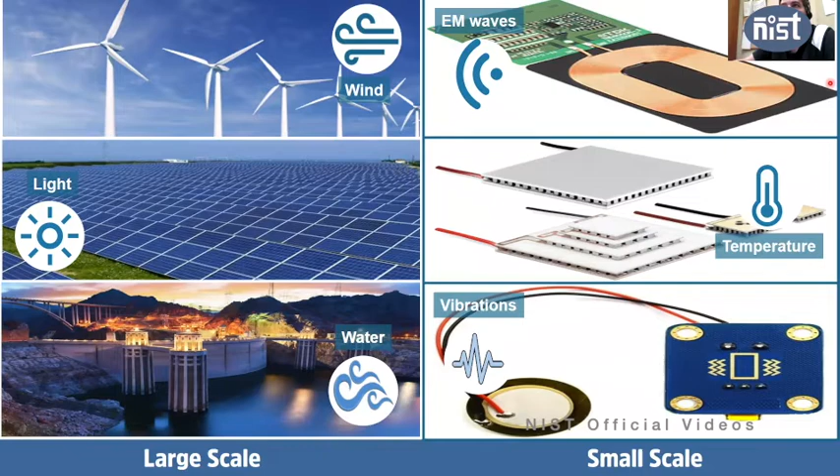So these different energies available in our environment can be harvested using different devices. Typically RF coils for electromagnetic waves, Peltiers using the Peltier effect from temperature gradients, or for vibrations and more generally mechanical motions, piezoelectric materials can be used. This gives rise to small-scale electrical energy generation using any of these three devices.

So the question is, why do we need such a diversity of power scales, and what are these low power levels useful for? The answer is two reasons. The first is that these energy harvesters are becoming more capable—nowadays we are getting more energy out of these small devices.

The other reason is that the electronics we currently use are using less and less power. So as they become lower power consumption, we can get these small-scale energy harvesters to feed our electronic gadgets.

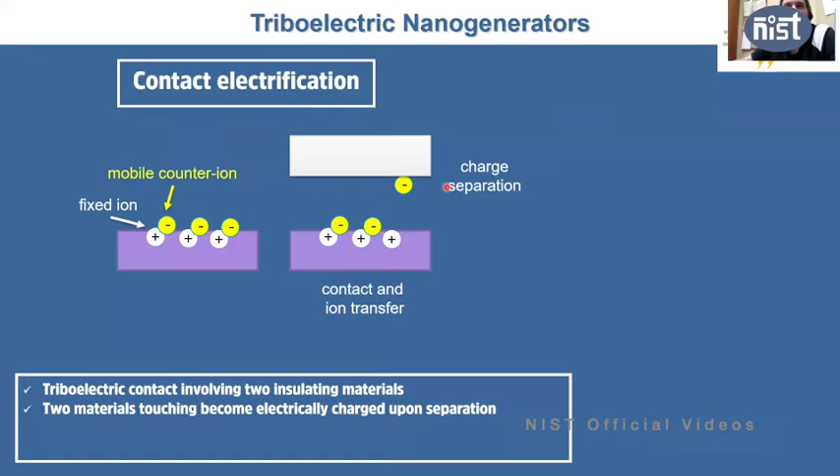So you get one negatively charged material and one positively charged material, and you can choose the materials from what is called the triboelectric series. This has been known for over 100 or 200 years, and this series orders materials according to their ability to become negatively charged, meaning they capture electrons, or positively charged, meaning that they release electrons when in contact with another material.

Typical materials you can find and use are nylon, a material that is very much used when you make these devices, and PMMA, so these are polymers typically on this side. On the other side, you get Teflon, which is very negatively charged, polystyrene, or PET. In the middle, you typically have metals, which do not transfer charges, so they don't become electrically charged in a large amount. What you want is to contact very highly positive materials with very highly negative materials, and you get the most charge transferred between the two.

When you have this charge transfer, you rely on electrostatic induction to generate an electrical current. You put two metallic electrodes on the backside of your insulators or polymers. Because the polymer is charged, these metallic electrodes redistribute their charges on the surface. The negative triboelectric material will induce positive charges on the surface of the metal, and the positively charged dielectric will induce negative charges at the surface with the dielectric.

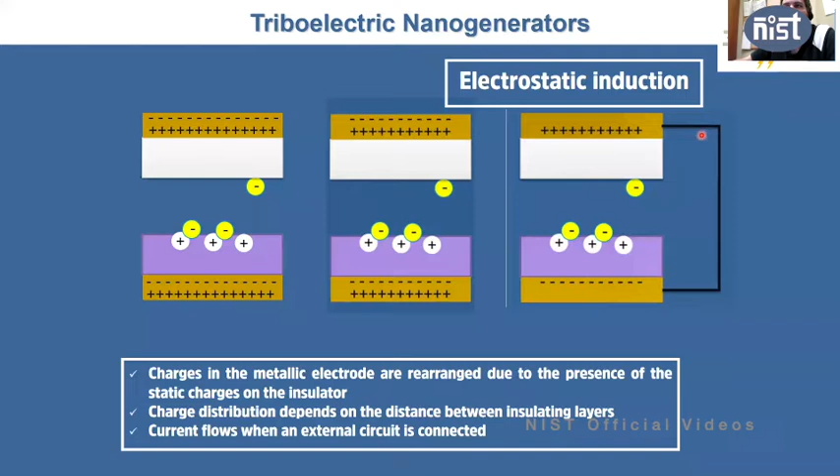Now you can move one relative to the other. As you move, you neutralize the charges and also the redistribution of charges on the metallic electrode. If you connect a resistance between these two materials, as they come closer, the current will flow from one electrode to the other. As they move backwards, the current will flow again and the charge redistribution will appear. So with this electrostatic induction, you have the possibility to drive charges through an external circuit.

If you join the two things, contact electrification that gives you the charged materials, with electrostatic induction that lets the charge flow through the external circuit, you have a triboelectric nanogenerator. This has been developing very fast since 2013, and there's a whole range of applications. The most typical is energy harvesting, but you can use it as active sensors or self-powered systems. They have already been demonstrated for implantable devices, electronic skins, and flexible electronics. So the range of applications for these triboelectric nanogenerators is extremely large.

They work in four basic modes. The most common is the vertical contact separation mode, where your two materials come in contact in the vertical direction via a mechanical motion, come out of contact, and this is repeated cyclically so that current flows through the external circuit. You also have the contact sliding mode, where the two materials slide on one another, and basically the same phenomenon appears. As one material goes away from the other, charge flows through the metallic electrodes.

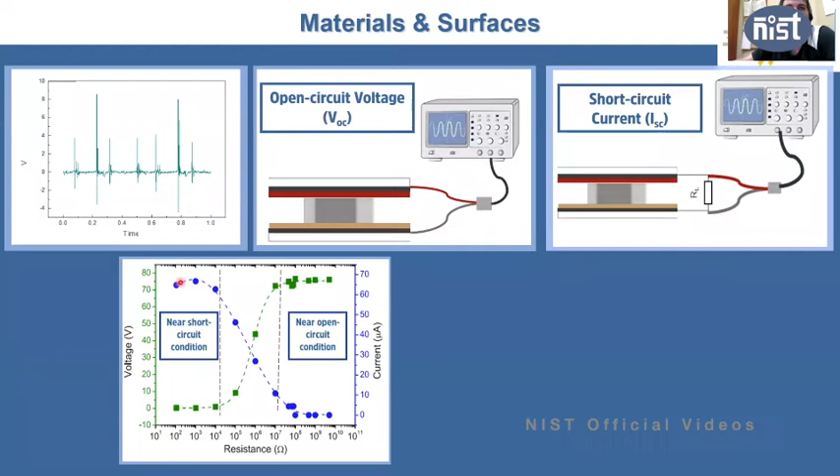And you vary then this load resistance that you put between the two metallic electrodes. And you get the near short condition, where you have a very high current and a very low voltage. You have the open circuit condition, where you have a very high voltage and a very low current. And you have a transition between the two, where the current goes from high to zero and the voltage goes from zero to high. Multiplying these two quantities, you get the power, okay? And you get the power as a function of the load resistance.

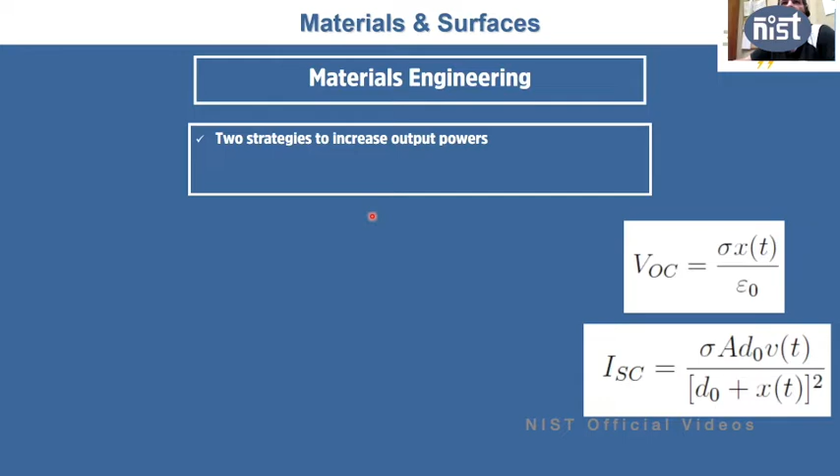And you have two strategies to increase these power outputs. The first is you change the surface triboelectrification. So you change the number of surface charges that you can get on a given material. And this can be done by changing the dielectric permittivity, because the surface charge is directly related to the dielectric permittivity, just like in a capacitor.

What we have done is PDMS doping with nanoparticles of silicon oxide. So we have changed the diameters from 22 nanometers to 367 nanometers, and we have changed the concentration of nanoparticles of silica that you put inside your PDMS material. And this is typically what you have. So there is a maximum of the electrical output, being the current, voltage, or even the power density. You have a maximum as a function of the concentration, typically around 5 to 8%, and this is related to the ability that you have for the material to distribute these nanoparticles inside the polymer.

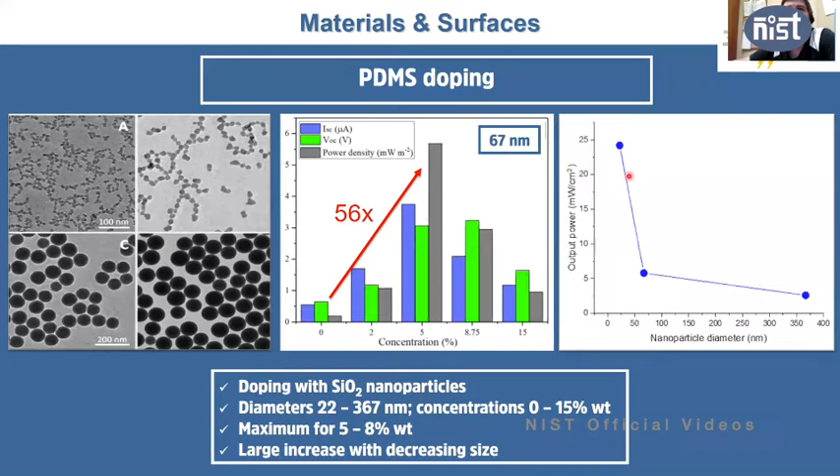It also depends on the nanoparticle diameter. You can get higher output voltages by doping the PDMS material with smaller nanoparticles. And we believe that this is related with the differences in the dielectric constant of these nanoparticles as the size goes down.

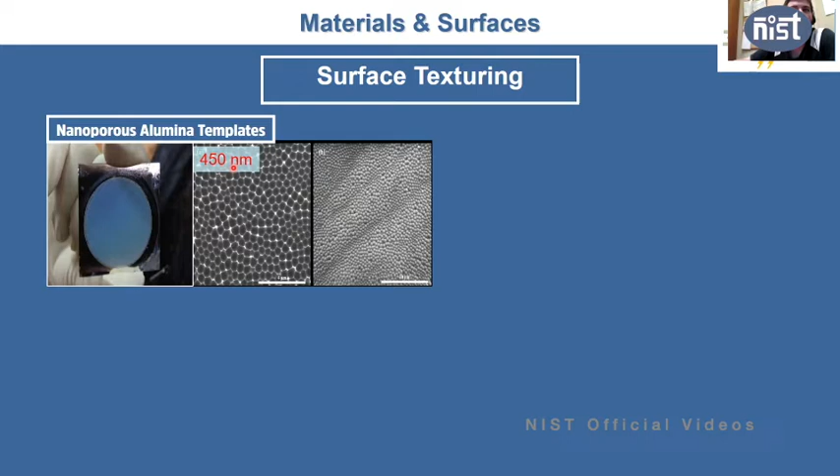You can also do surface texturing, so you can change the surface of your material by different mechanisms. One very simple method is to use nanoporous alumina templates. These are templates that you can get just by anodizing aluminum into an aluminum oxide. And if you do it right, you can come out with these small dimples on the surface of aluminum, and they can have nano-size features. You can go from 30 nanometers to 500 nanometers very easily.

And you can also use micromachined silicon molds, okay? And you can go from something that is on the nanometer scale to something that is on the micrometer scale, and see what happens on this multi-scale arrangement.

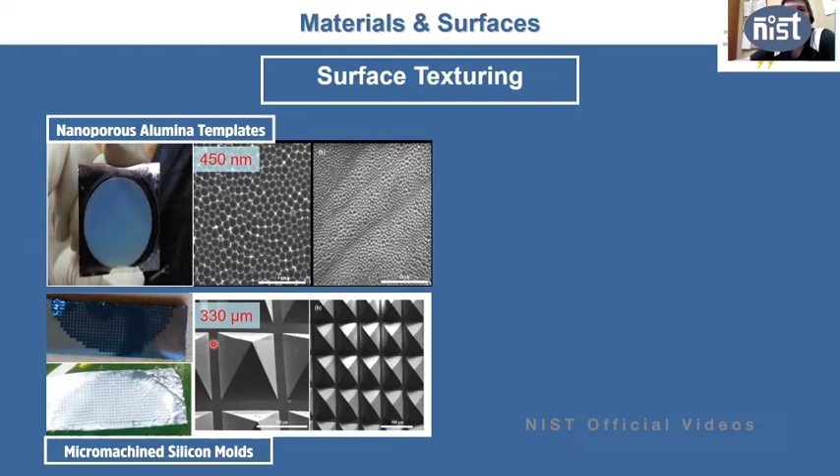This is just an example. So the output voltage that you get as a function of time for different structures. So for PDMS, simple PDMS films that are flat, with the silicon template that has micrometer features, and the aluminum template that has nanometer features. And what you get is typically a 2 times increase in the output voltage just by changing the surface of your material, of your triboelectric material.

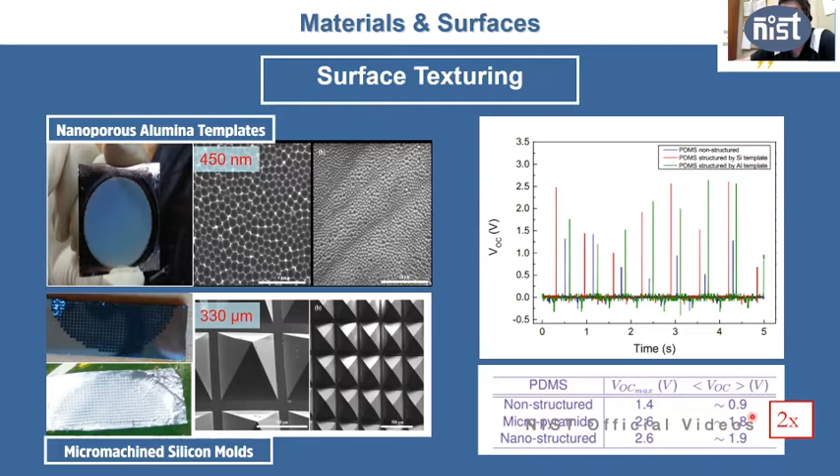And interestingly, the output voltage that you gain does not relate a lot with the size of your feature. So there is a minimum size that you need to get the maximum output increase available. Now that we have the materials, we have the testing system, we can integrate all of this on different applications. I'll start with footwear. This was one of the first things that we have done. So I'll go fast on these first applications so that I can focus on the ones that I think are more interesting at the end.

So we all know that while we are walking, we are putting pressure on our foot, and particularly on the heel. So if you look at the footwear, typically you have something like 7 by 3.5 centimeters square available on the back side, and we want to take advantage of this area to make a generator that can harvest your energy in walking. So with this area, we can put a triboelectric nanogenerator there. This is what we have done.

We have optimized the configuration that you can put inside, not only the size, but what can we do with these materials. So this is a very simple structure that looks like this. Here is one of the triboelectric materials, in this case Teflon. On the other side is nylon. You have the 2 electrodes on the top and at the bottom. The other structures are similar, but instead of these 2 parallel plate structures, you can have an arced structure, or a zigzag structure like this, where you can put multiple steps.

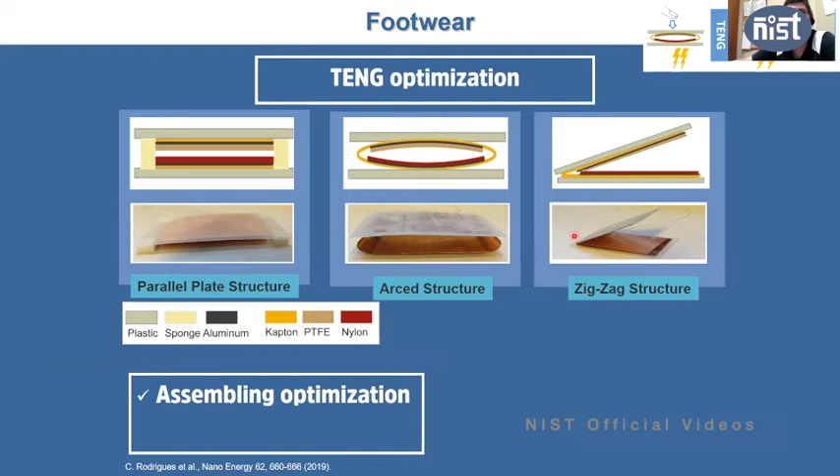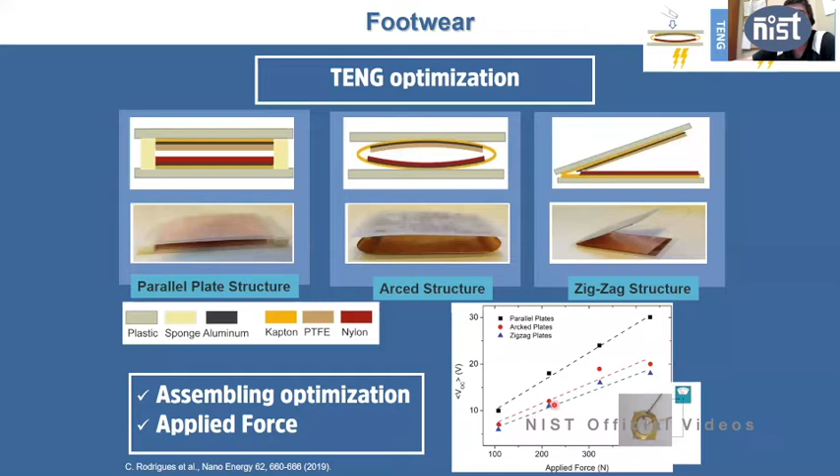So we have optimized this assembling, and what we found is that the parallel plates are typically the best for this particular application. We have changed the force. They are linear with the force. This can be important if you want a sensor. The 3 of them are linear, but after this we have focused on the parallel plates because it's the one that gives you the higher output power. And you can also change the number of pairs that you put there. So we went from 1 to 6. I'll show you here some of the results.

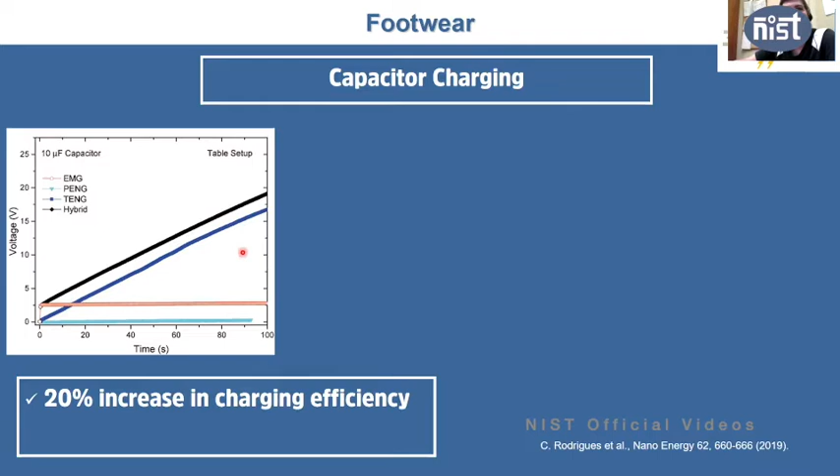But if you use the hybrid generator that we have done, you have a fast increase coming from the electromagnetic generator at the beginning, and then the steady increase from the triboelectric generator at a later stage. And this gives you a 20% increase in the charging efficiency. So we have integrated this in footwear; this was the table setup that we have. This is already on the shoe, and you get more or less the same behavior, and you can charge different capacitors integrated on a shoe, and this can then be used to charge some sensor or other electronic gadget.

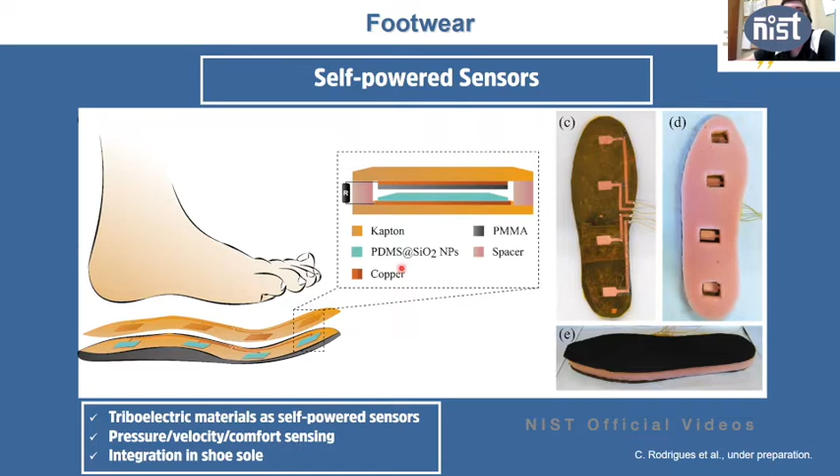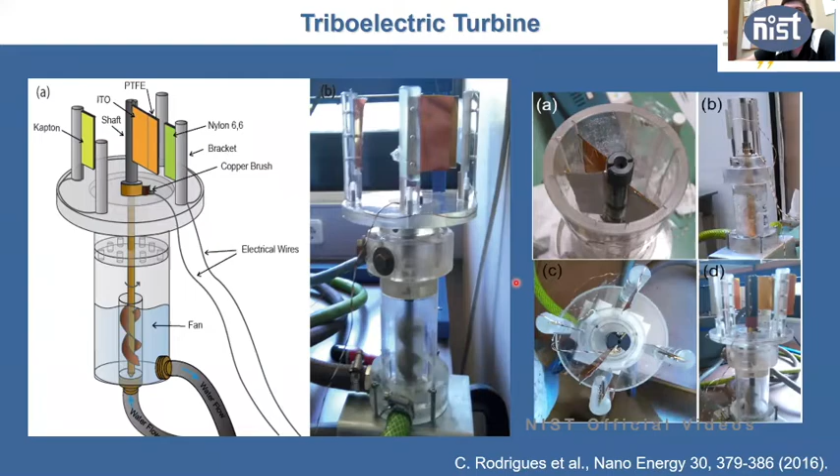So what we have developed is a sort of a turbine, where water flows through the turbine. This makes this shaft move here at the top, and as the shaft moves, there are 2 materials that come in contact as this rotates. And this is the construction of the prototype that is now available. So this is how it works. Water is moving here. The 2 materials touch, and as they touch, they can light up these LEDs that we have here. These are about 100 LEDs that can be lit up just by this water motion passing through our turbine.

This is the operation principle. As this rotates, one of the materials, in this case Teflon, comes into contact with the nylon. As it contacts, there is charge generated at the surfaces. They slide on one another, and as they slide, the electrical charge will move from one of the electrodes into the other. And as they come apart, then you have again the redistribution of charges on the metallic electrodes, and current will flow the other way when the opposite happens.

So we have also optimized this work. We have studied it as a function of water flow and for different numbers of plates on the turbine. As the number of plates increases, you typically have a decrease of the voltage that is generated because you need a larger pressure to induce the same type of movement. But as water flow increases, the voltage also increases, and then it saturates above about 30 liters per minute. The same happens for the current, where you have an increase and then a saturation. And of course, the power will get the same behavior because it's just a multiplication of the two.

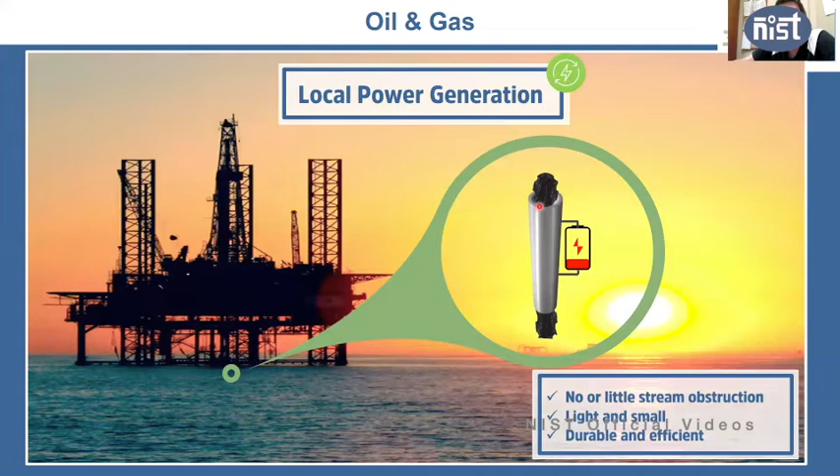These generators cannot obstruct the stream. This leads to pressure losses, and this is something that the industry doesn't want. They have to be very light and small because they have to fit inside this small pipe, and they have to be durable because they have to resist these high temperatures, these high pressures, and the flow of the fluid that is coming out.

And so what we did is we went to Repsol in Madrid. Repsol is a very big company that has several extraction wells around the world, and they have facilities for these high pressure measurements. So we went up to 1500 psi and to 200 degrees Celsius to see if our generators work in this.

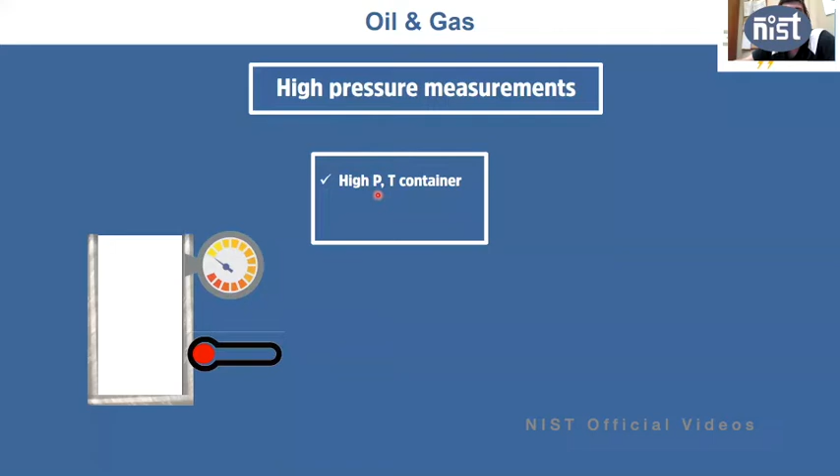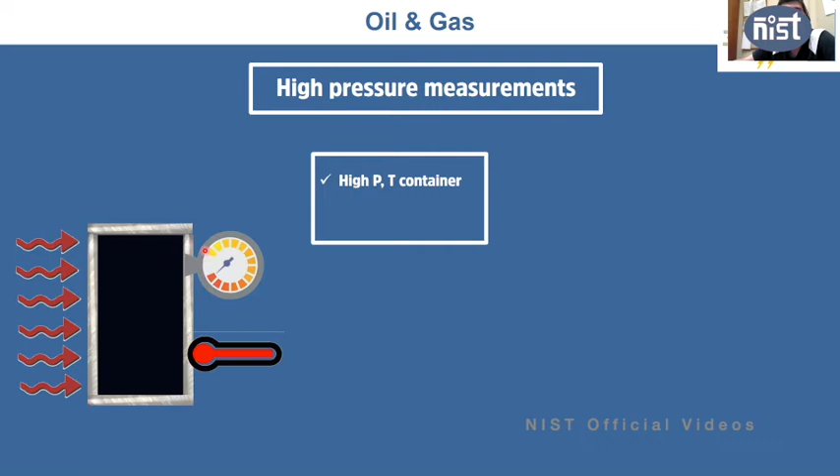So the setup is very peculiar. They have a high pressure and temperature container, which is here. And what they do is they fill it with crude. After being filled, if you want to increase the pressure, they heat up the system. So as the temperature increases, the pressure inside also increases. The problem is that you cannot vary the pressure and the temperature independently. As you increase the temperature, the pressure will also increase, and vice versa.

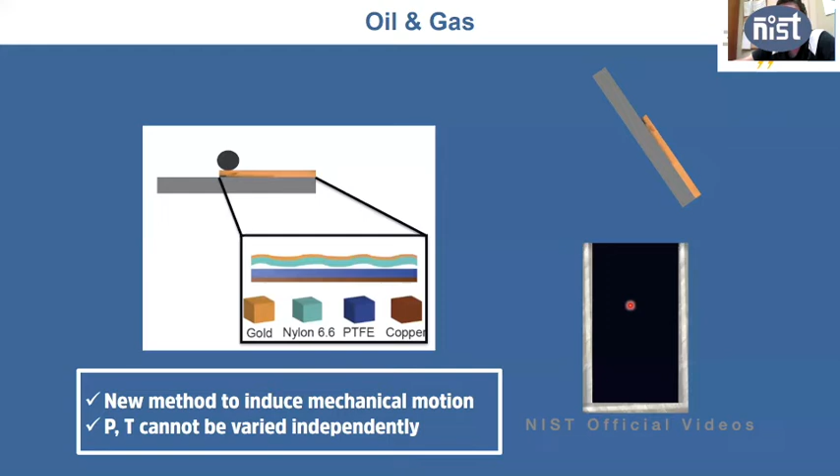Also, the container here is closed, so you do not have an easy possibility to have a motion. So we had to come up with a new method to induce mechanical motion inside this container. What we did is to have a triboelectric generator like this with a rolling sphere on top. As the rolling sphere puts weight on the two materials, these two materials come in contact and they generate electrical energy. So we put this inside our tube with the crude inside.

And this is an example of how it is going to work. As you move the tube filled with crude, the spheres will move and you get an output voltage being generated.

This is the pressure container that we have used. This is our device here on a Teflon plate. And this is the high pressure bottle system that we have used at Repsol. The bottle is here, the heater is outside, and therefore the lag with the pressure. You have a thermocouple here to measure the temperature outside. And what we do is move the container. As you move the container, the sphere will roll, and as the sphere rolls, you have an output voltage.

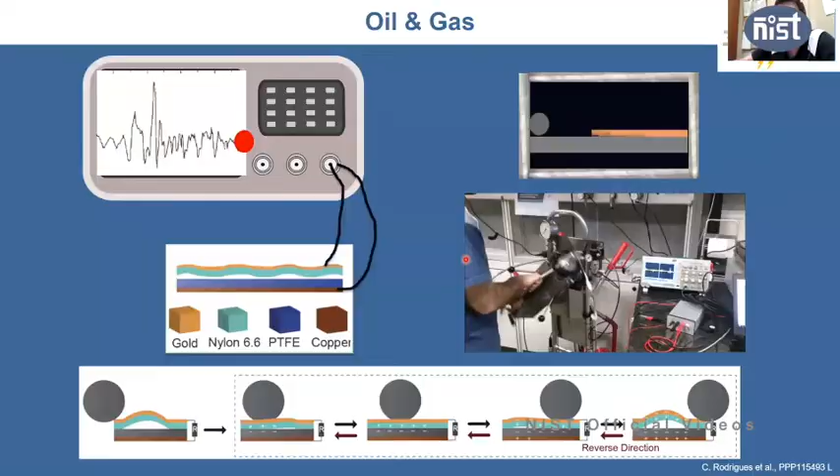This is an example of one of the experiments that we have done. The container can move back and forth. As it moves back and forth, the spheres will roll. As the spheres roll, energy is generated by the two triboelectric materials coming into contact with one another.

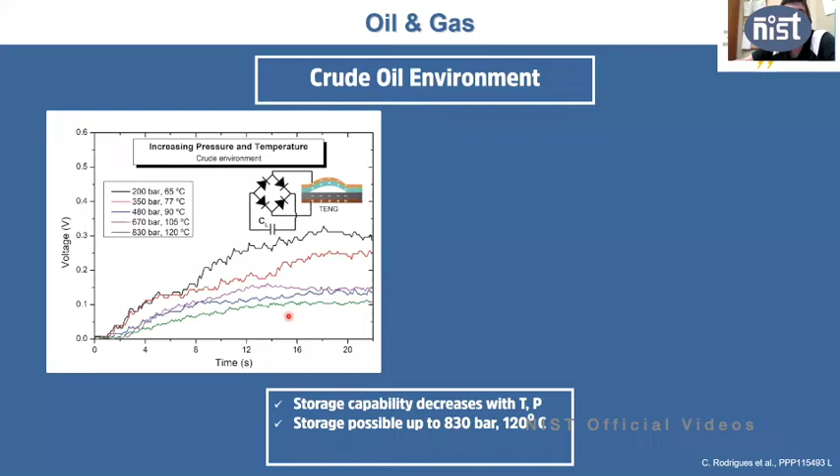We have also shown that we can charge different capacitors at different pressures. We can go from 200 bars at 65 degrees up to 800 bars at 120 degrees, and you can still charge capacitors at these high pressures and these high temperatures.

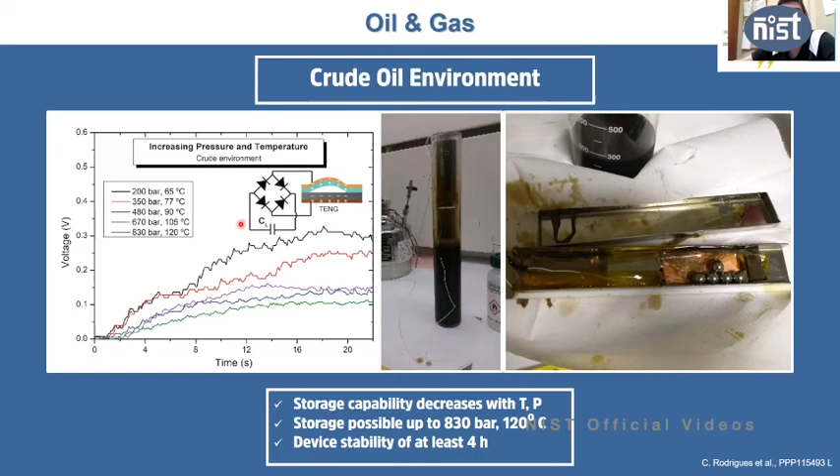But at the end, your device looks like this. This is your container with the crude oil, and this is how everything looks at the end. These are the rolling spheres, this is your triboelectric materials, and everything else is crude oil, just all over the place. But the device, even after all of these tests, was stable for 4 hours at these very harsh conditions.

We did another experiment to try to discriminate what is happening from the pressure versus the temperature, and we did this with methane. This is also a gas that comes out of the extraction wells, and in this case, because you have a gas, you can separate the temperature from the pressure.

In this case, we decrease the pressure, and as you decrease the pressure, the output voltage comes down a little, but it doesn't change very much. If you increase the temperature, now you will have a very high effect. The materials will degrade very fast at temperatures higher than 100 degrees, so temperature is the most important factor in reducing the output voltage that you get out of triboelectric nanogenerators in these environments. So you need to come up with different materials that can avoid this effect.

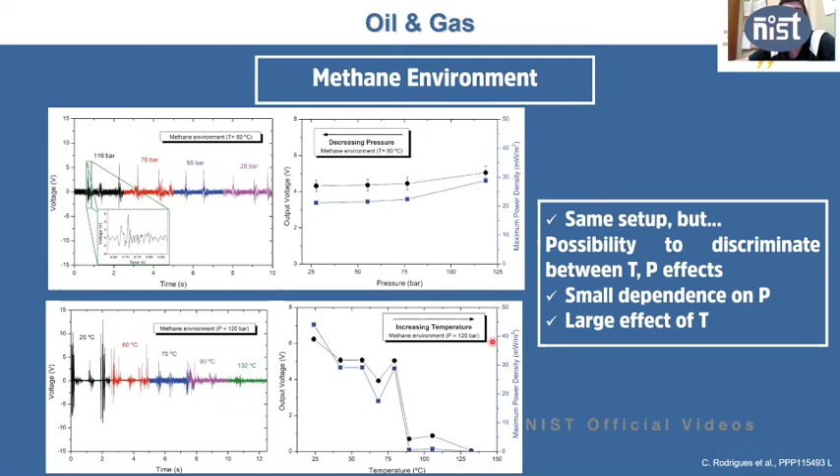Tomorrow we'll have dynamic tests in Norway at high pressures, but we have built here in Porto a small setup that can give us dynamic conditions in crude oil. We have a pump for oil that puts oil through these pipes, and then it comes out, and this is all a closed loop circuit. Here inside this point, we can put your triboelectric nanogenerator and see what comes out as a function of the dynamics of the flow.

We have used oil inside, and we can go up to 50 degrees Celsius and 55 liters per minute, but at room pressure. Now we are doing tests up to 200 bar in Norway. This is what you get: as the flow starts here, after a little while, you get all of this output voltage coming out of your device inside crude oil in these dynamic conditions. Hopefully next week we'll have some more news on this.

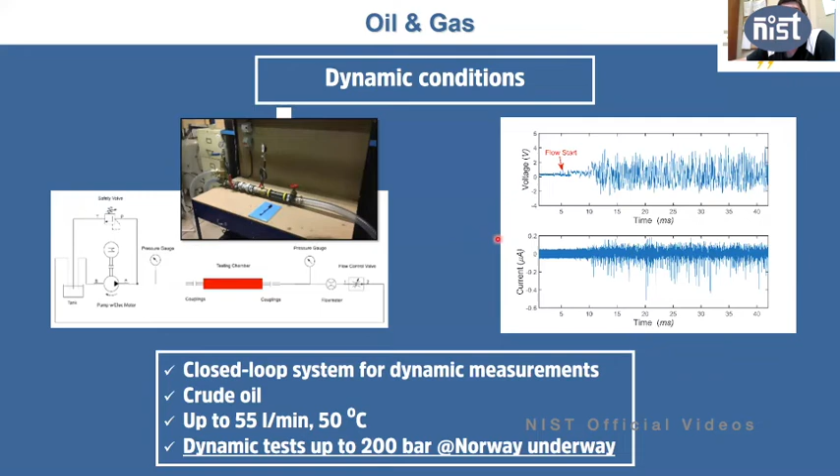So the last application that I'll talk about is on blue energy, and what we want to do is harvest wave energy from the ocean, but our particular study is to test it in relevant conditions. This is something that has not been done before, and that we found decisive in what is happening. Blue energy using triboelectrics is something that is happening very quickly, and the applications of this are also very high.

You can put triboelectrics on a marine buoy and take advantage of the ocean waves to generate electrical energy for a number of applications, such as the Internet of Underwater Things, marine exploration or surveillance, or even ocean cleanup systems. So the applications are huge. If you want, you can read a recent review on this topic that is just coming out in Energy and Environmental Science.

What we did is that we wanted to assess how triboelectric nanogenerators work in actual sea states. People typically use small testing setups and small waves to see what is going on, but these are not representative of the real conditions on the sea. So we have installed 3 different triboelectric nanogenerators in an actual navigational buoy in a 1-to-8 model.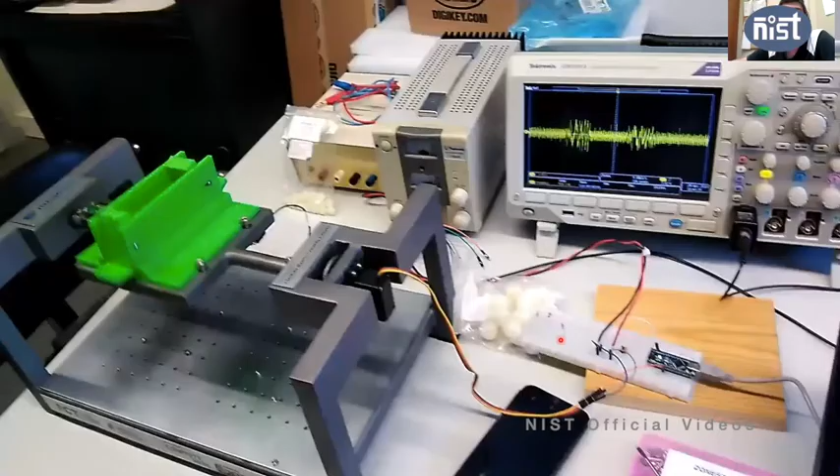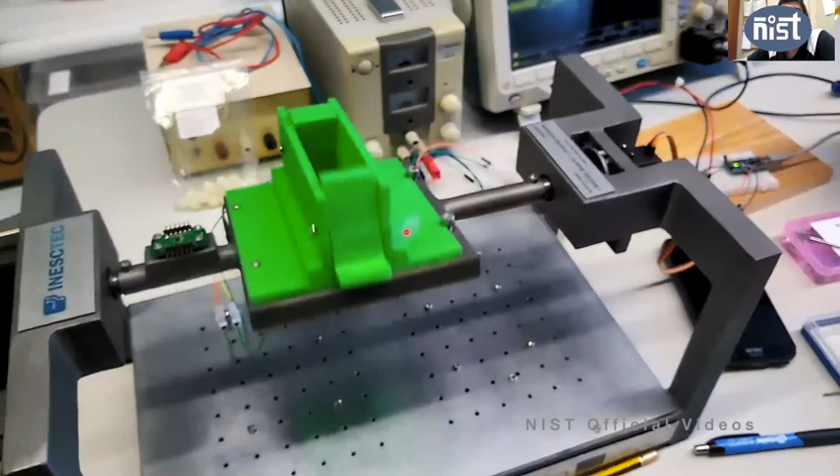First, we have developed a testing system to simulate the wave motion, and this is it. It's just a motor that rotates at a given velocity and frequency with the materials inside, and you can see the spheres inside rolling on top of triboelectric materials.

The 3 of them behave more or less similarly. What you get is, as you increase the pitch amplitude, you increase the current and the voltage. And as you decrease the period, you also increase the energy that you generate.

These are small period waves, and here are the long period waves. This is the system that is generating the waves. The waves come and the buoy moves according to the motion of the waves. You see here that the motion of the buoy is something like this: it rotates along the wave, comes up, and then goes down again in a very smooth way.

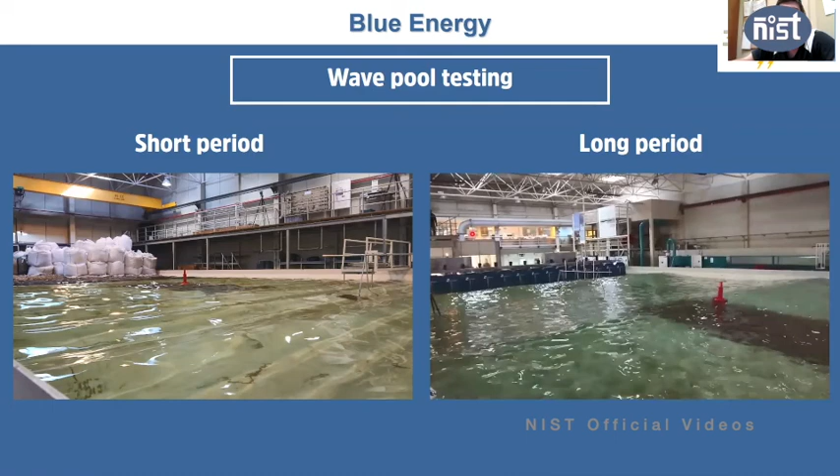This is the buoy, this is the wave basin that we have. These are 5 markers used to retrieve the motion of the buoy in the wave pool. This system is similar to the one used in movies with the green screen behind, and it gives you the 6 degrees of motion of a body.

So this is the roll, the pitch, and the yaw - the rotations. This is the surge, the sway, and the heave - the linear motions of the actual buoy.

And you see that the pitch, if you... sorry, we can go. Sorry, let me get back. This is my final slide. Okay, it's working now.

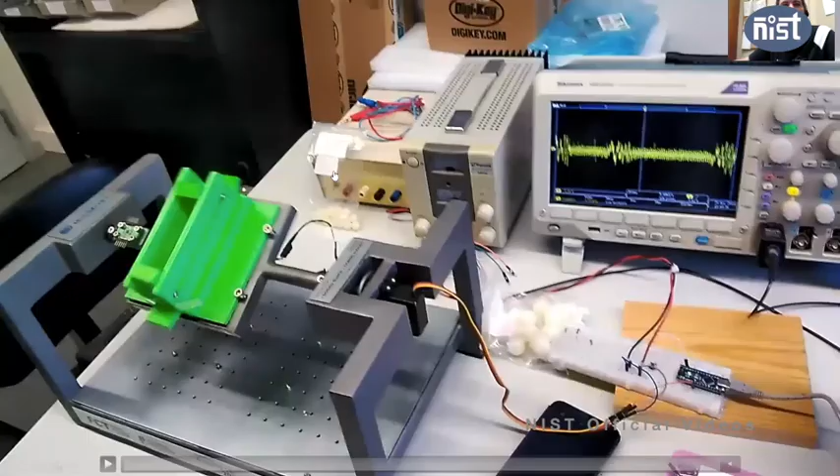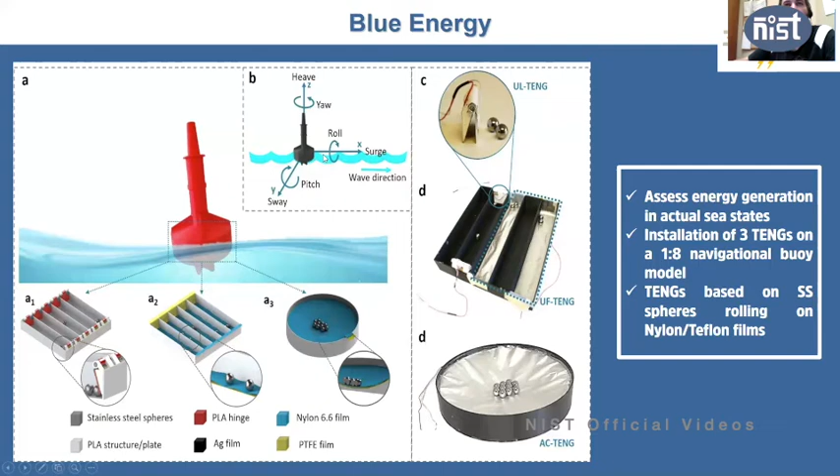If you look here, the pitch is the motion at the y direction, the roll is the rotation at the x direction, and these are the 2 most important degrees of freedom that you get out of a buoy. And here it confirms the one that varies the most is the pitch, and then the surge as the buoy moves also in the direction of the wave.

So these are the results that we get out of all of these experiments. We have varied the height of the wave and the period of the wave. As you increase the amplitude, you increase the energy generated by your devices. But as you decrease the period, you get a maximum at the frequency of oscillation, the natural period of oscillation of the buoy. So the movement of the buoy and the movement of the triboelectric generator are coupled, and you have to study the dynamics of the two things together, not just the generator per se.

The device that showed the largest energy generation was again the lateral one and the anisotropic one. But the most important thing to take from here is that the lateral device generates energy across the largest range of periods of motion. This is critical because, for example, sea state buoys do not typically operate at their natural period. Typically the sea waves have periods in this range, not the ones that have the highest energy generation.

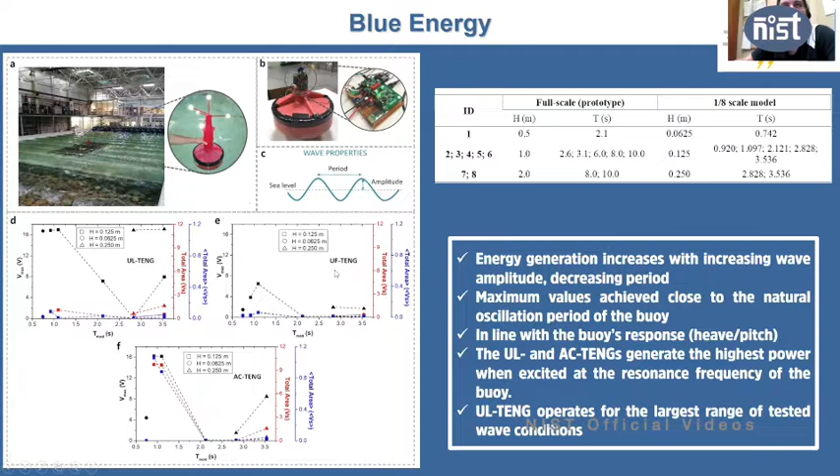So as a conclusion, I hope I showed you that triboelectric nanogenerators are a very promising energy harvesting technology that is appearing.

The output power increases with increase of the surface area, and you can engineer materials to get higher output powers very easily. There are a lot of applications you can get out of this because they are extremely versatile. You can go into footwear, you can have something like flows...

...water or crude oils, and you can even use this in very extreme and harsh environments. They are also very promising to be used in wave motion, but you have to properly measure them in actual sea states or actual sea conditions.

So as my final slide, if it appears - it's taking too long, sorry. Professor Panda asked me to show you a little bit of the opportunities that you can have to move and make research abroad, in Europe or in Portugal in particular.

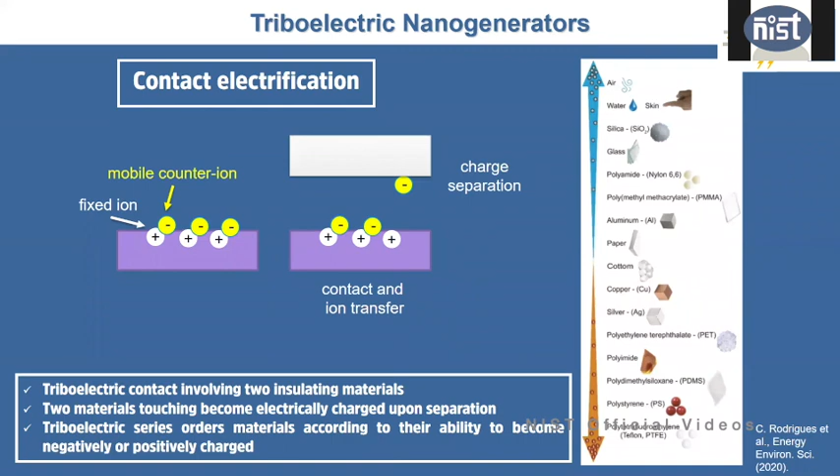I'd like to thank the speaker, Professor Joao Ventura. The speaker gave some very good examples, and the application area seems to be very interesting. At the end, he gave an overview of how to apply for higher study and research activities in their country. I think it will be very helpful for all the participants, especially the students doing the PG program. So thank you, Professor Ventura, for accepting our invitation and having this talk.